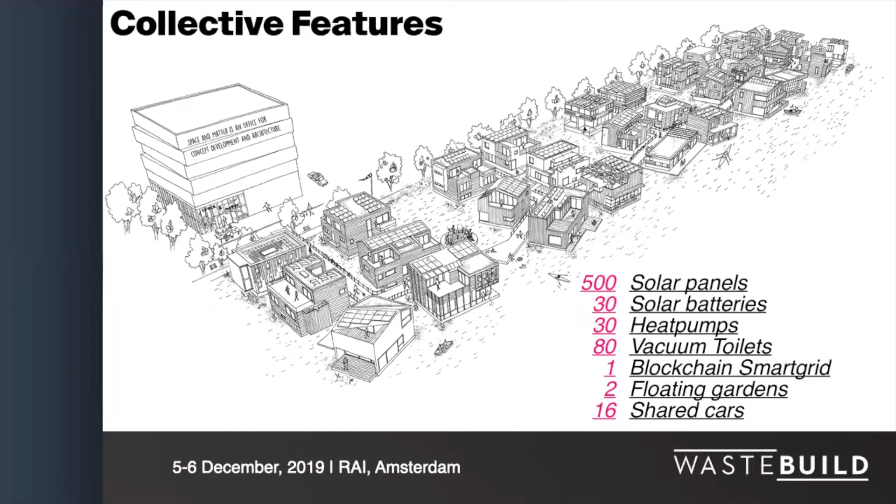So also what you see here, it's quite technological. The previous project was more about using waste, and actually this is more about how do we install technology to make it self-regenerative, not so much about using waste, but more about preventing that we have to use resources from elsewhere, and once we're there, making the life cycle self-regenerative to prevent causing waste.

And the project is there, so you can also visit it. They are close by, so this is what's installed right now. Actually, it's a smart community, and the people also trade the energy.

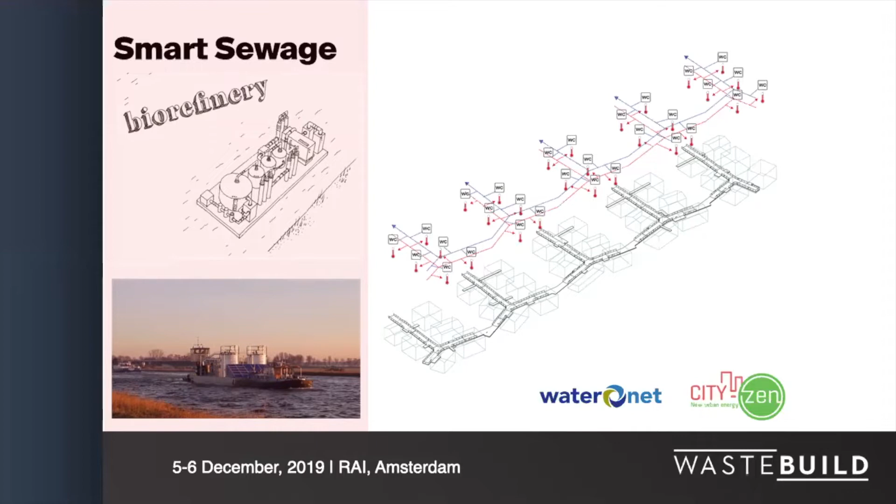We try to reduce our waste and our footprint as much as possible. There's a collective fleet of electric vehicles shared amongst the community, to maximize mobility with fewer vehicles in your backyard. We are also off the grid in terms of black water and gray water, because we have a decentralized biorefinery, which is even generating heat. It's similar to the biogas boat, but this is a more professional installation.

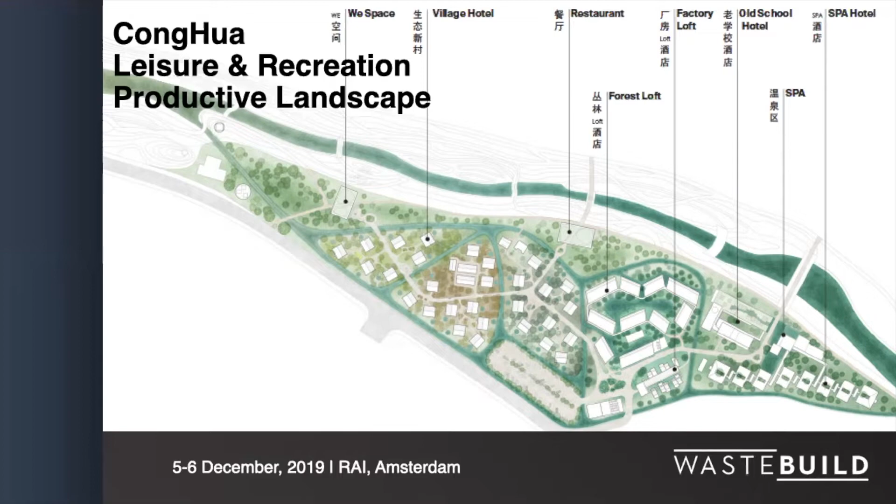And then maybe one more minute to show you what's going on in China. We're working on a village project, so this is not an urban development, but a development outside of the bigger cities. Villages are running empty because people move to the city, so what to do with some old buildings in a Chinese context. It's a hotel development, so it will be a hospitality resort.

Actually, what you see here, this is a cutout of an old school building. There are concrete slabs, and we cut off some pieces of the slabs to create this cascade, and then the cascade becomes a rooftop park, with hotel rooms beneath it. It's just like a gimmick, but it's getting in place.

There's an old factory building, and how to use the old factory building. We actually open it up and make the park go inside, and then plug in hotel rooms or small loft spaces to show the beauty of this former factory space connecting to your hotel space. Well, this is just architecture.

Where it becomes much more interesting and relevant to talk about today is how do we create awareness amongst our visitors that if you're in a hotel space using old buildings and going on a retreat from the big city, China's inland tourism is booming. We need to create awareness of eco-flow, and you need food, you need linen, you need local produce, so how do we make this local landscape into a productive landscape.

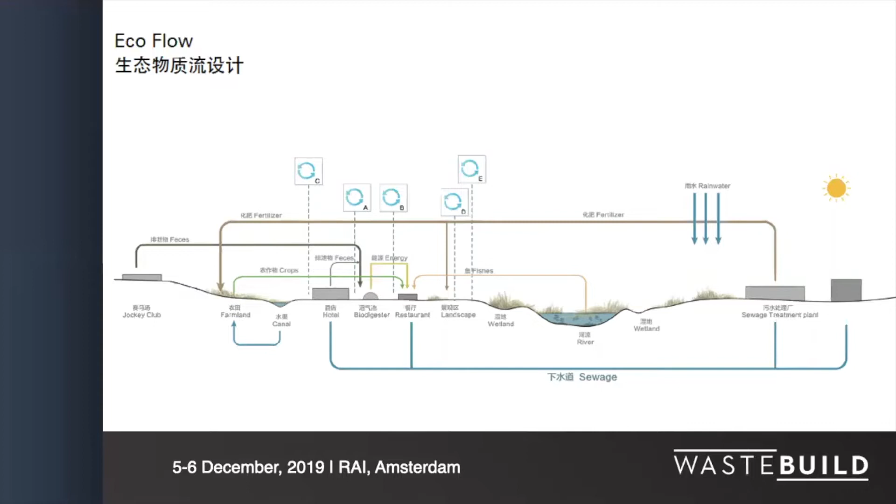That's where we installed smaller pavilions. One pavilion is growing herbs, that's the one on the left side. Another one is where we bring the coffee dirt and actually grow mushrooms. Another one, we use plants to dye the linen. You can have dragon fruits create purple pigments to dye your linen if you want purple linen, and some other showcase examples.

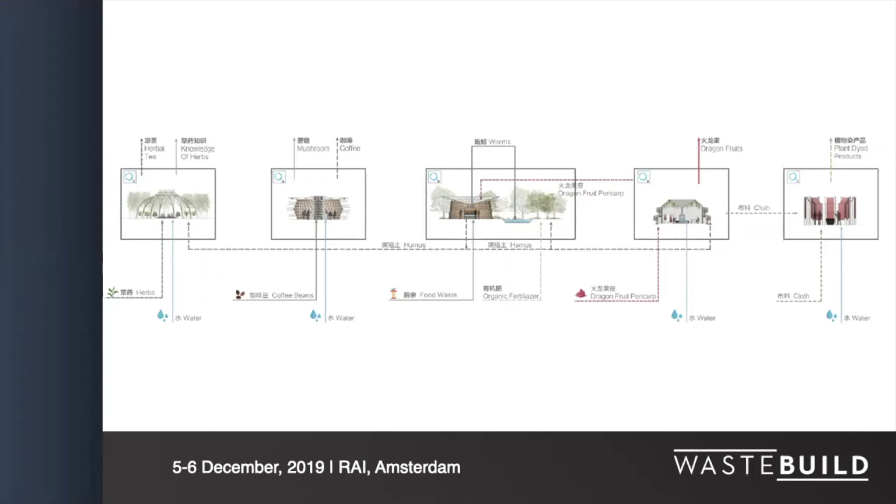Mainly this is for creating awareness and showing how we can actually close the cycles of food, waste, and water. That's it.

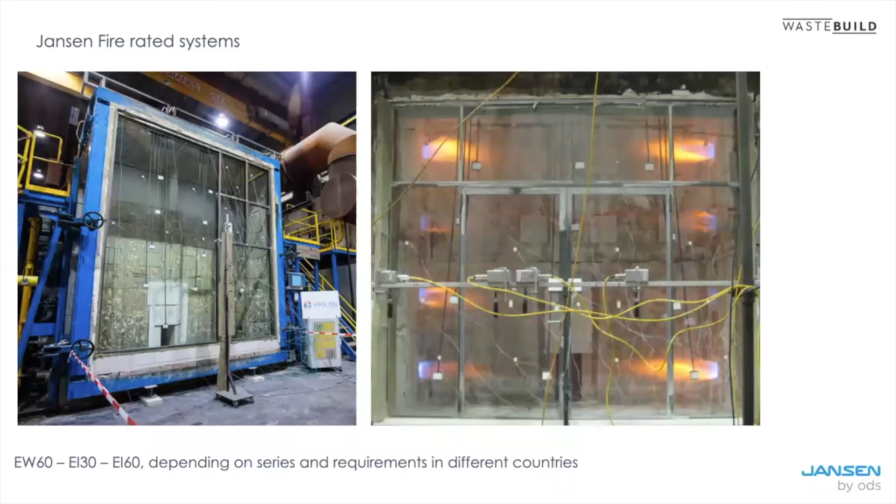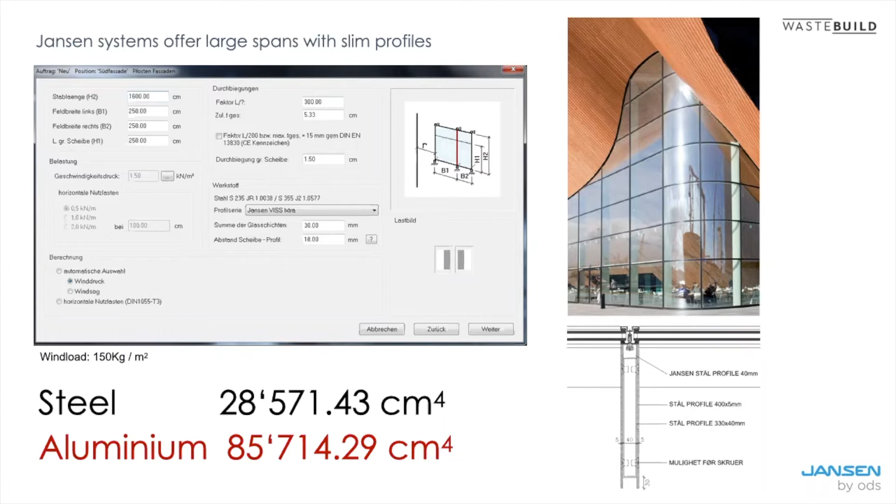So architects might like projects like these. It's complicated, we do technical workout calculations for our customers who produce the facades. We don't produce facades, we supply the system and the technology.

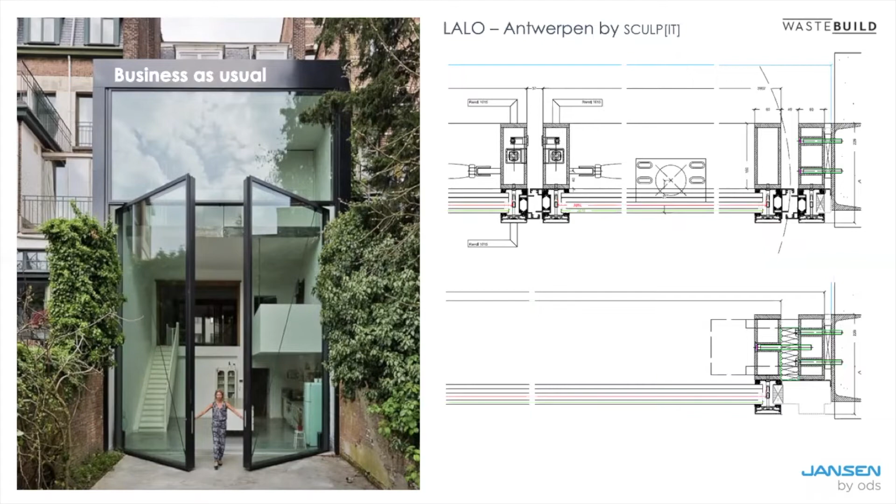We supply old systems, and this was actually in, I think, 2014, we got a question: can you renovate this? And we thought, yeah, we might renovate this. Because you see this graph, we were thinking about the technical lifespan of this system, which was by then nearly 50 years old. Now the system is 50 years old, and we said to the owner of this building, you could renovate this only if the profile is still fit to be renovated.

So we made a little study and found out that the profile was still okay, but maybe the cover at the outside was outdated. So we upgraded an old system to become new again.

We then asked NIBE from Bussum for the life cycle analysis. How do you calculate the technical life cycle of a steel facade system? And actually it was qualified as top of the market. So we were very happy, and we thought all the construction companies would call us and say, well you've got the best facade system in the world, so we want to buy it. But that's a bit tricky because it costs a little investment.

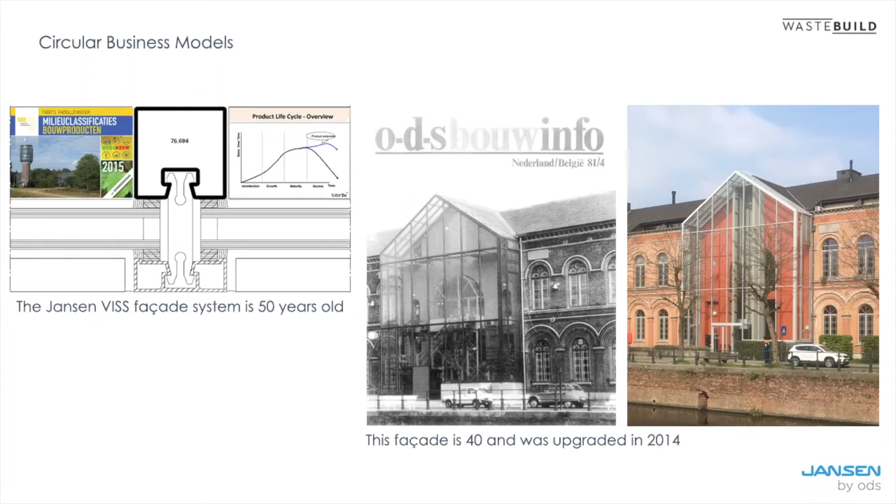And it's both steel, so this looks totally different than our super elegant facade profile, but you can make very intelligent buildings with solutions like this.

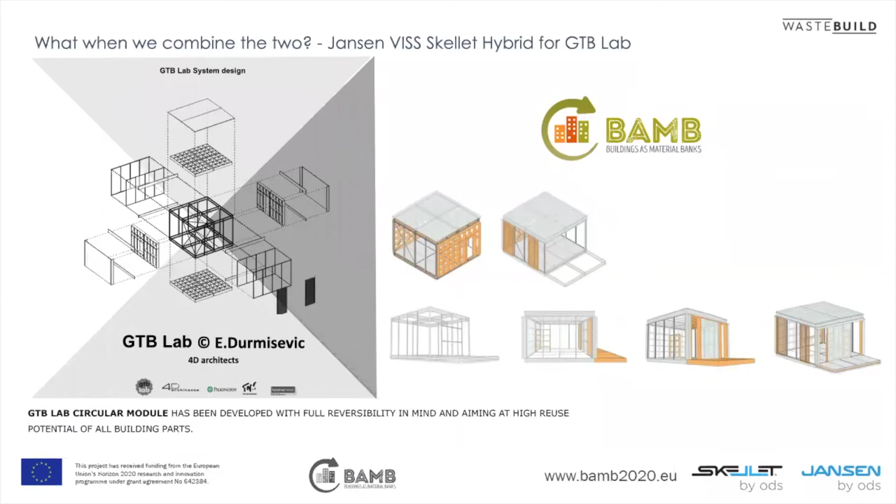This is a project where we teamed up with the GTB lab, and we studied together with the team how you should make reversible connections if you want to use the building again. You need intelligent connections, and we actually got half of this pavilion in Amsterdam today.

So we took half of it because this is going on the road again to Heerlen next month. We thought we can stop in Amsterdam and show the principles of how to connect in a reversible way, so come over later and we'll show you.

So now we have to come up with a market solution. How do you sell a system like this? Because we're only in the first stage, design with the architect, build with our customer, and all the rest, we don't care. Have a good technical life and hope to never see you again.

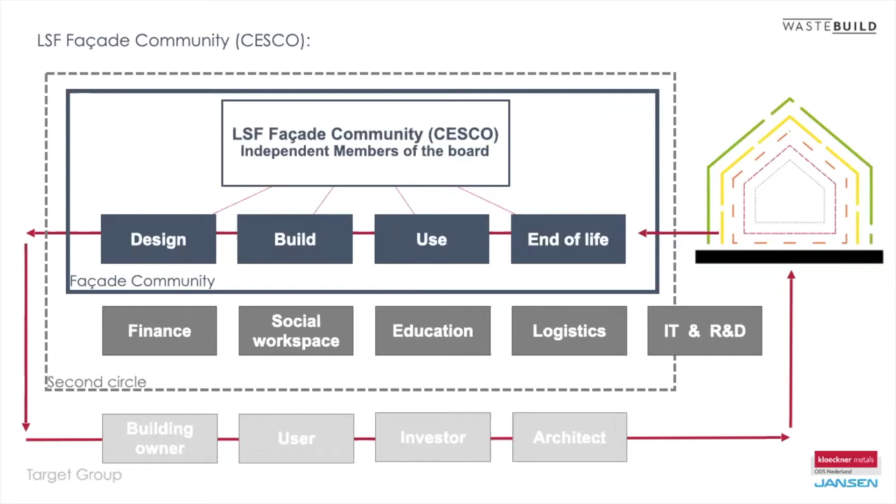This is not the way we can work in the market. So we founded a foundation to come up with a market solution. Very technical, but we're there in the design, build, use, and harvest stage of the market. Might take 5 years, might take 20 years, whatever. We monitor, we take the data to use again.

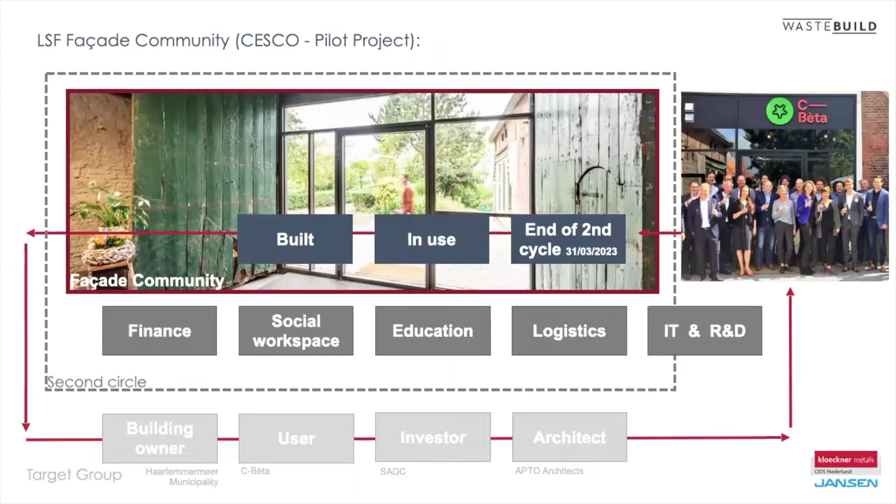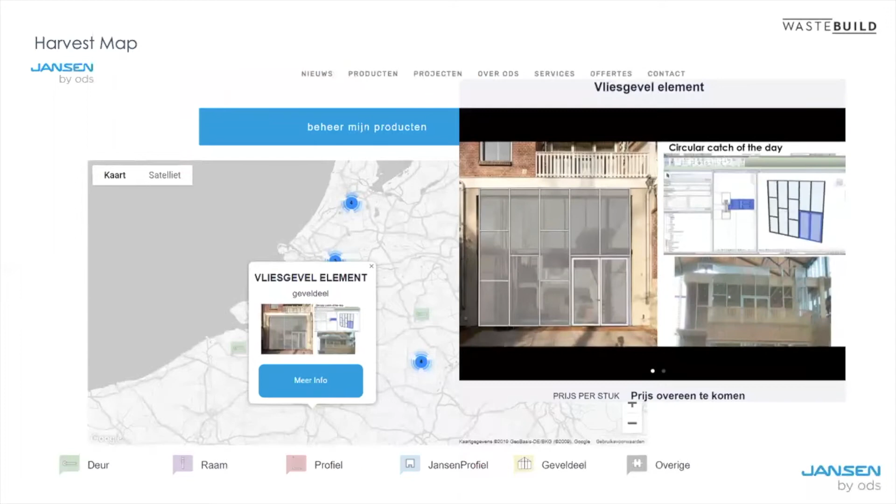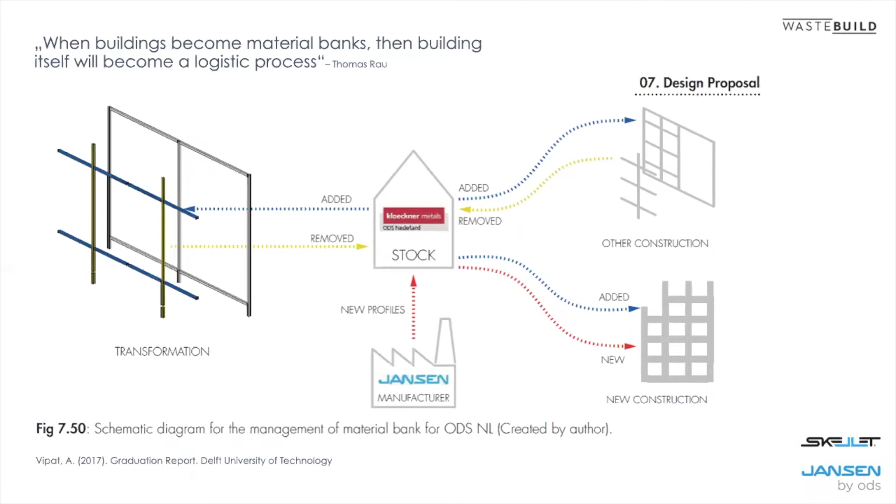So we had pilot projects in Hoofddorp, at C-Bèta. We supplied a facade, we leased it, so we finance it. We take waste from big projects to put on our harvest map and maybe use, so this is reverse logistics. We have to find out how this works. We've never done it before, so now we're taking things back, which is pretty difficult in an organization like ours.

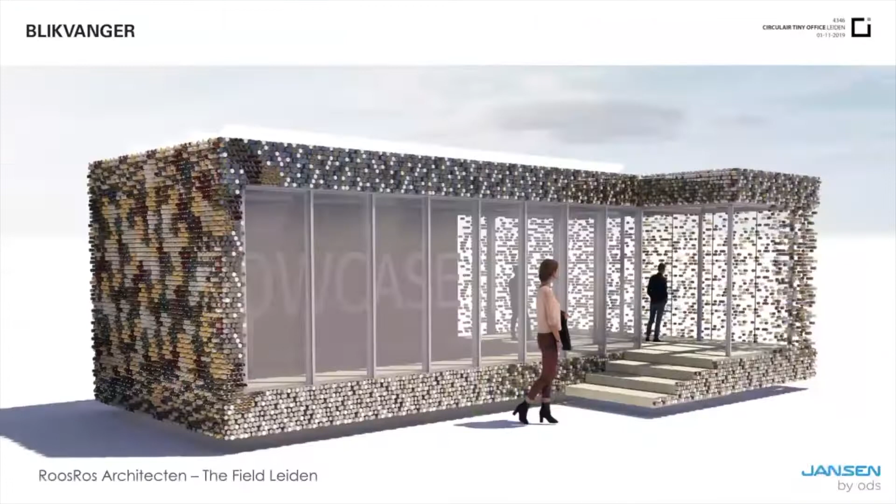But actually, the facade from Brussels is in BIM to be, well, this is reversible logistics, to be used in Leiden at the field, maybe. They want it, they can have it. We modify it. This is another project for Leiden, which is called a blikvanger. Translated in English, it's eye catcher. But it's actually also made out of cans, Coca-Cola cans.

Because you might have to pay a little fee to take the cans back to the shop. So we put it in the little pavilion. So when you think, where can we build this?

How many minutes? 1. Okay. Let's build all the roofs in Amsterdam, in Rotterdam, with tiny houses, whatever, floating houses maybe. We have very light, interesting material, this is also the guys from Oostkaart are using.

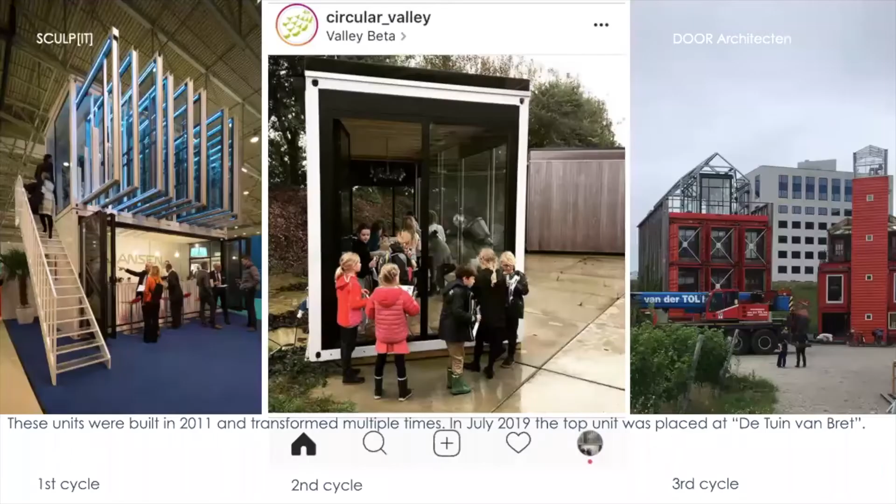Harvested steel material. We can put this in gardens, on roofs. We've put it at the Tuin van Bret with DOOR Architecten, just as an example. And this is actually it. So we're doing it, it's difficult, but let's try and do it better next year. Thank you very much.

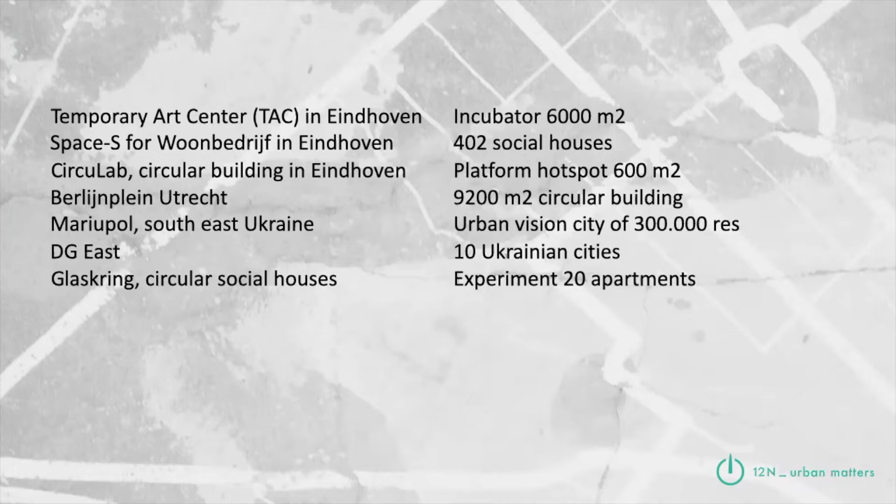There is a spot in Utrecht, 9,000 square meters for circular building in the cultural industries. In Ukraine, I'm quite often working in Ukraine at the moment. I did an urban vision for 300,000 residents city, etc., etc. We put in numbers, we put in those things that we can measure easily. We make it a little bit technical very often.

And but maybe this is for me much more interesting for this panel discussion that we're having in a minute. Because what did I do? What was my role? I was a founder. I was a center midfielder, as I always called it, in this temporary art center. I was a quarter maker of this circularity hotspot. I was doing urban acupuncture in times of war. I was an inspirator, an innovator.

I may have been raised or educated as an architect and an urban planner, but my role is totally different every time, and I think that counts for many of us, but we very often stick to that what we learned we should be. And I try not to be what I learned. I try to be what is necessary in a specific urban situation.

So that's why I called myself, instead of what I used to be, urban designer, I call myself somebody who works with urban matters. And in this case, I always say it's about designing, not only designing the building or the landscape or the urban vision, but it's much more often, and I never learned it in that way, but I learned it by designing the process. Who talks to who?

What language do we speak? What instruments do we use? So now I'm doing a project in a small village city in Hoorn, in the north of the Netherlands, and we only are going to use infographics, not architectural pictures, not words, only infographics.

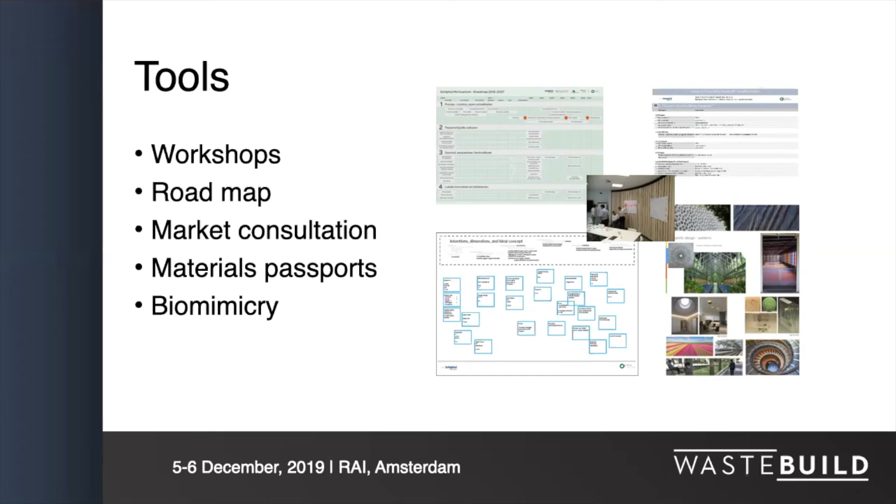So I've put some pictures. It's a small building. You can just see that there's a public side and an airside side. So people are coming in on the land side, and the deceased people will be entering and exiting on the air side.

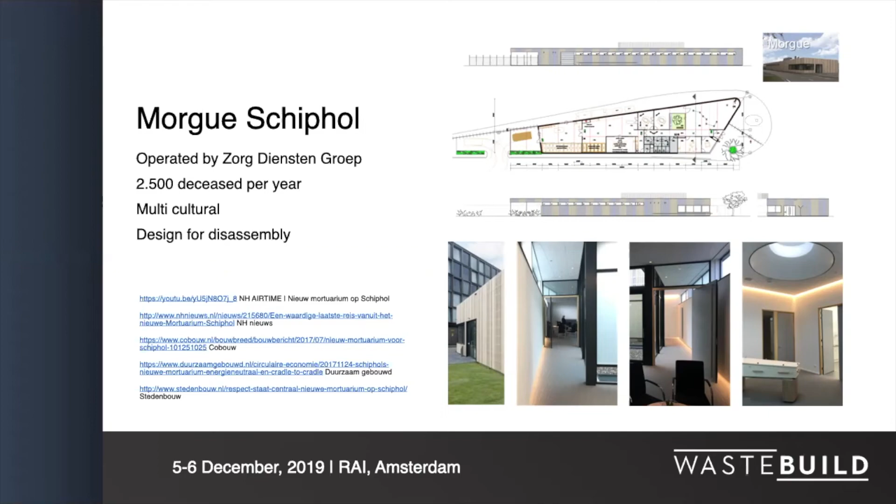Really, really interesting approach, this partnerships - I think what has been demonstrated very well is that all of these projects probably wouldn't have happened if there hadn't been partnerships in place. And as somebody who's worked with partnerships and put partnerships together over the last 20 years, I think one of the challenges is how do you actually keep the partnership going? You can get the right people together and start a partnership, but how do you continue it?

Who wants to, Martin? I've got a choice of two Martins. Well, I did not mention the specific subject of partnerships that much, but obviously there are - in the Ceuvel and the artists project, we established the community first, the network of end users, and then together with them we established the project, and the same we did for the floating housing community. But what makes the partnership tick, what brings it together, what makes the bricks and mortar actually come together, I think that's the common goal or the common interest, the shared ambitions and values like respect. And of course, there's different tasks and subdivision of responsibility, but it comes together to really aim for that same goal and the common ground to believe in, to actually go beyond a standard project, I'd say.

And you mentioned respect, and I think that's a really good word, and I know because obviously in every project things get tough - I've never had an easy project actually. So then hands up anybody who's had an easy project? No, I thought - respect is a word that you used. I think trust is another one which is really key for partnerships.